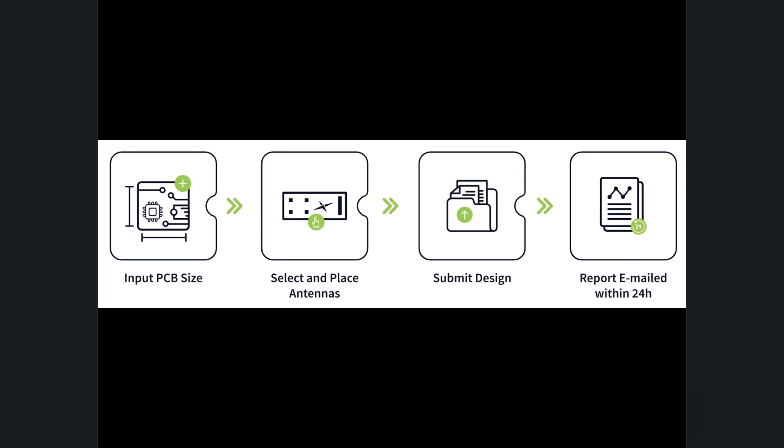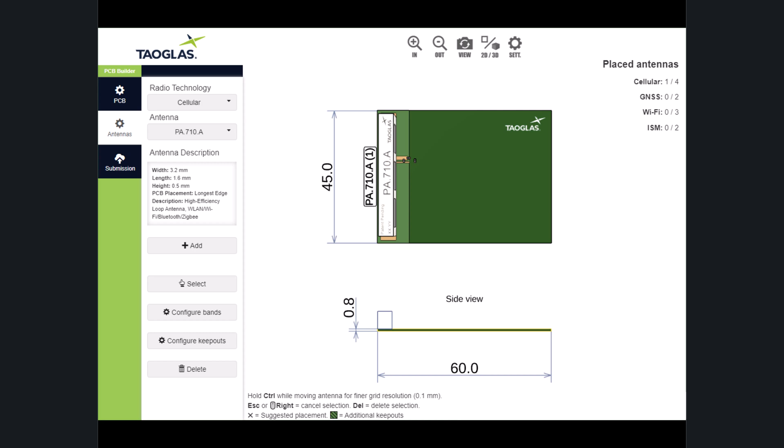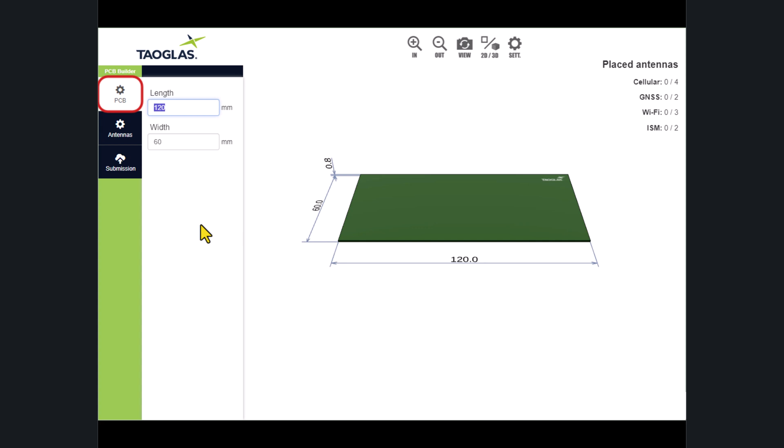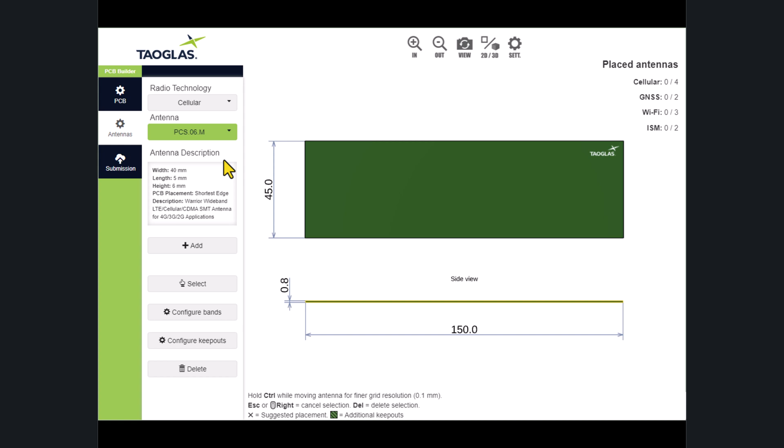To begin the design process for the Antenna Integrator, navigate to the PCB tab and input the desired length and width of your PCB. To place Taoglas antennas onto the PCB, navigate to the Antennas tab and select the radio technology required. Selecting a different radio technology will change the list of available antennas. To view some basic information, such as width, length, and height of the selected antenna, see the Antenna Description field. Once an antenna has been selected, click on Add, select your desired placement location, and click to place.

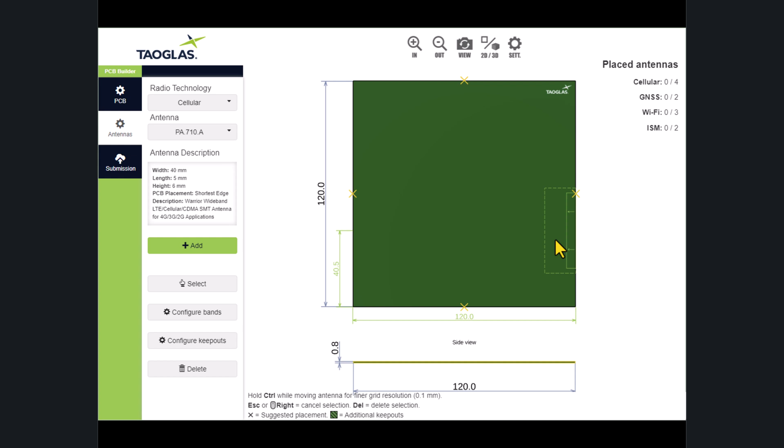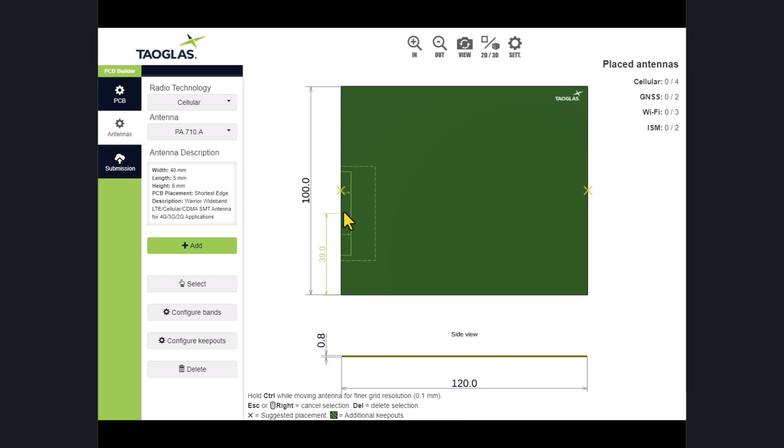Most antennas in the tool are edge mount antennas and can only be placed on the edge of the PCB. Others, such as the GNSS patch antennas, can be placed anywhere on the PCB. Each antenna will have a suggested placement position indicated by a yellow X. Once the antenna footprint has turned green, the antenna has snapped to the suggested placement position. These suggested placement positions are meant to guide users to place antennas in optimal positions for better antenna performance.

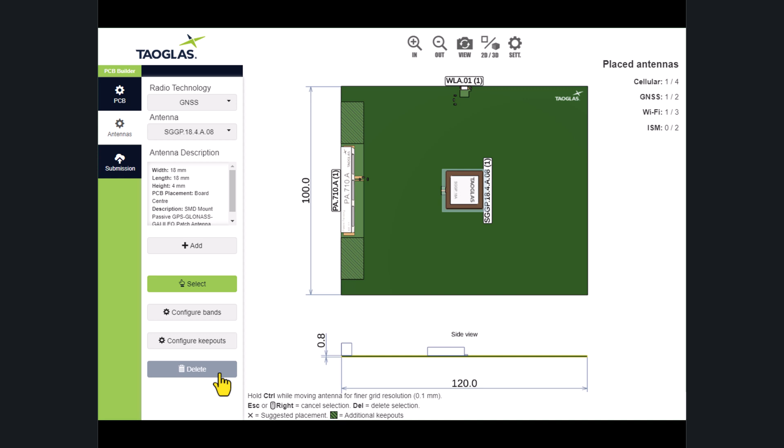To rotate applicable antennas, press R on the keyboard before placing the antenna. To exit Add Antenna mode, right-click or press Escape. To delete an antenna, click the Select button, click on the antenna, and click Delete, or press Delete on the keyboard. Continue adding antennas to the board if required. Note, antennas cannot be placed if they will overlap. This is indicated by the red footprint. Users can place up to a total of 4 cellular antennas, 2 GNSS antennas, 3 Wi-Fi antennas, and 2 ISM antennas.

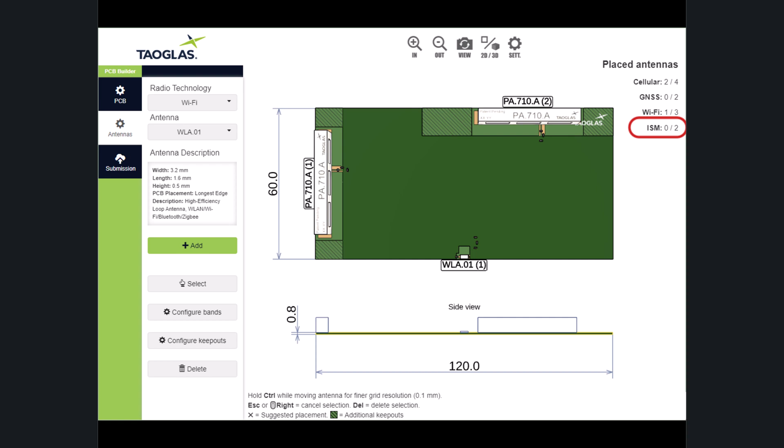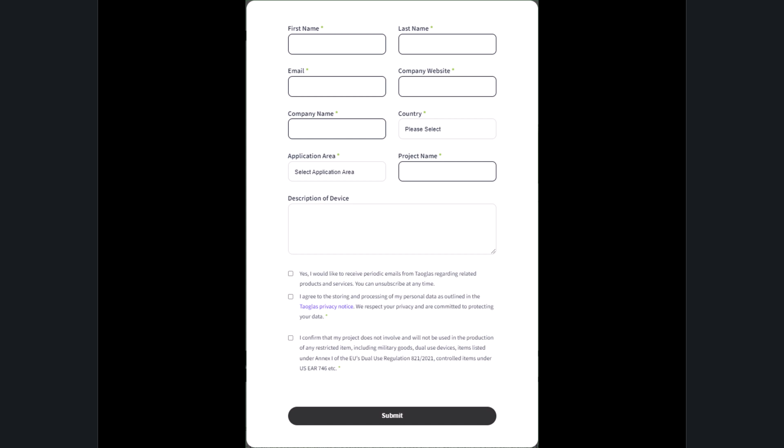Once the PCB design is complete, navigate to the Submission tab and click on Submit Design. Complete the form and click Submit. At this point, users will receive an email confirming that Taoglas has received the submission. Another email will be received when the submission is queued, and a final email will be received including the completed report as an attachment.

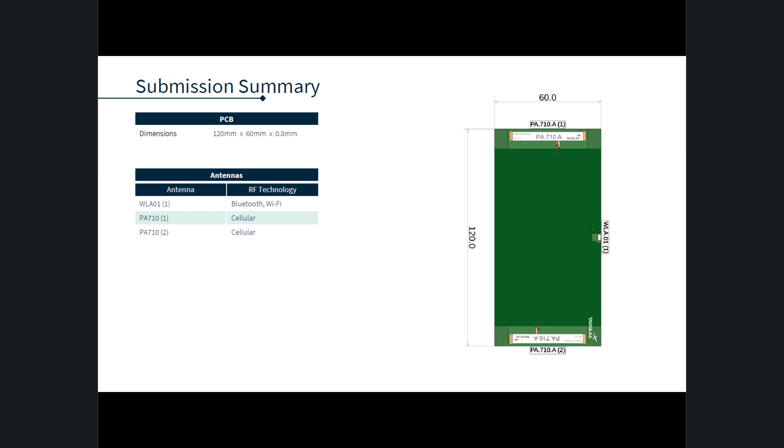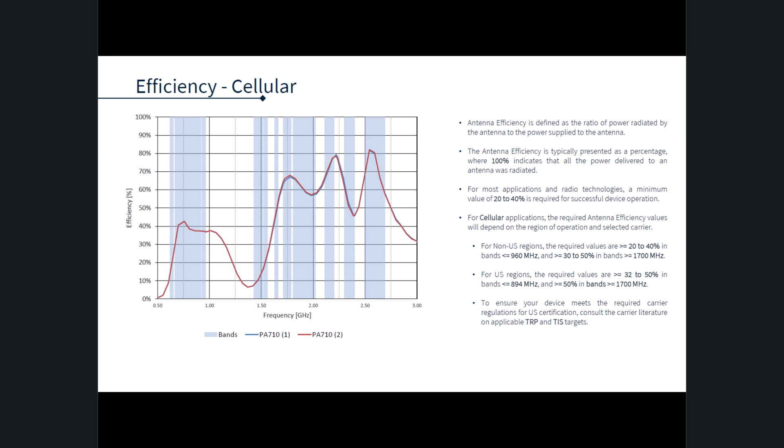The report will include submission details such as PCB size and selected antennas, as well as the antenna performance parameters for each radio technology. These include parameters such as return loss, VSWR, antenna efficiency, average gain, and for multi-antenna boards, isolation. If you would like to get quotes or view full datasheets for the selected antennas, please visit the antenna web pages linked at the start and end of the report. If you have any questions about the report, please get in touch with Taoglas customer service and include the report ID. To provide any feedback, click on the feedback link at the end of the report and submit the form.

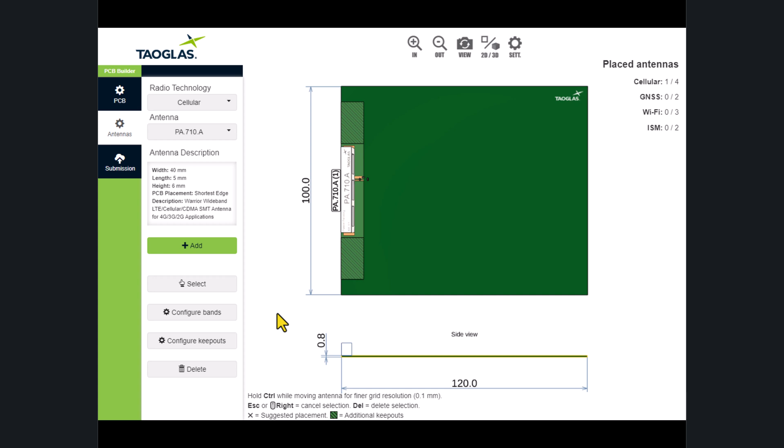The Antenna Integrator also has some optional features to aid in the design. Certain antennas have copper keep-out areas to ensure good antenna performance. The keep-outs are indicated by the striped areas on either side of the antenna. To configure the keep-outs, ensure the antenna is selected and click Configure Keepouts. These keep-outs can be turned on or off, and the keep-out value can be changed.

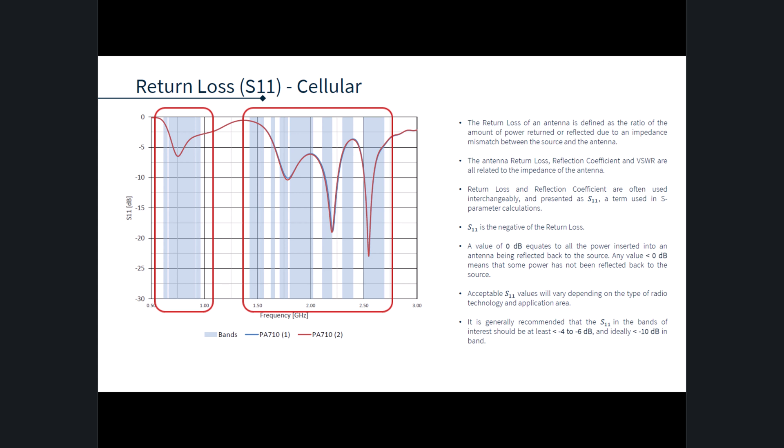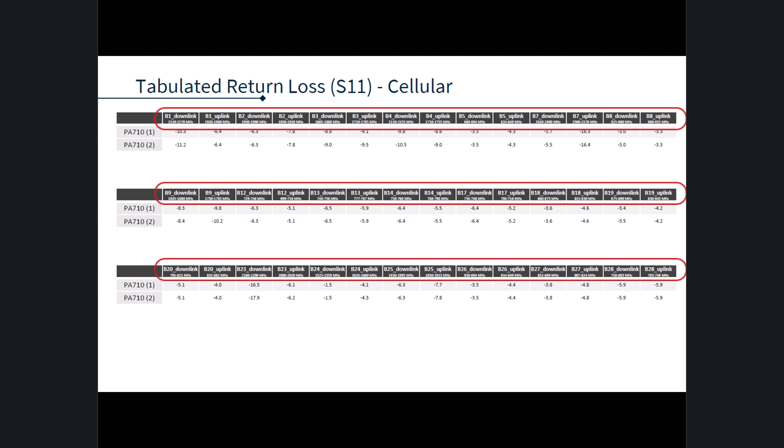Each antenna also has certain frequency bands associated with that antenna. These bands are shown in the report on the charts as well as in the tabulated data. Additional bands can be added for each antenna if required. These additional bands will also be shown in the report. To add more bands, ensure an antenna is selected, click Configure Bands, and follow the on-screen prompts.

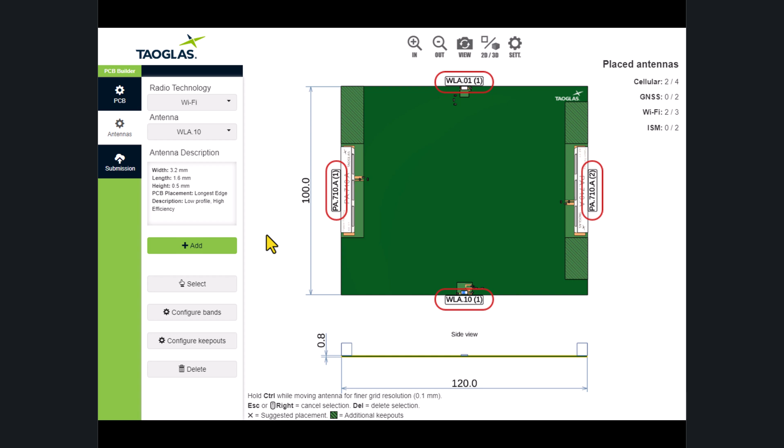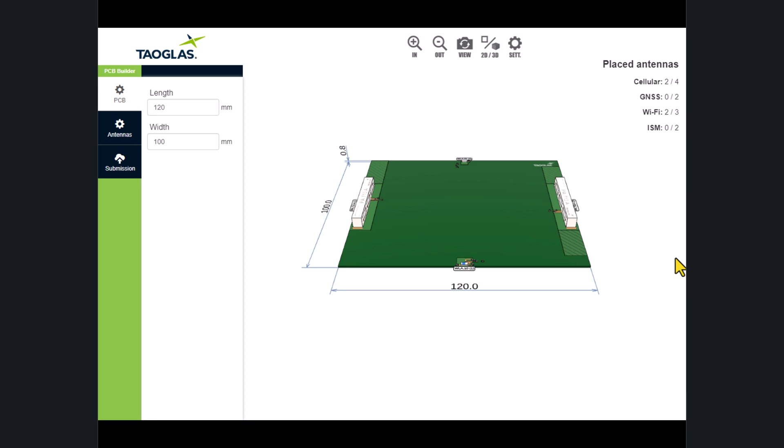Each antenna placed on the PCB will have a label indicating which antenna has been placed. In cases of small or large PCBs, it might be useful to change the label size. This can be done under the Settings option. The default view for the PCB tab is 3D. To rotate the PCB, hold right-click and move the mouse. The default view for the Antennas tab is 2D. To pan the PCB, hold the middle mouse button. At any point, the view can be toggled with the 2D/3D option.

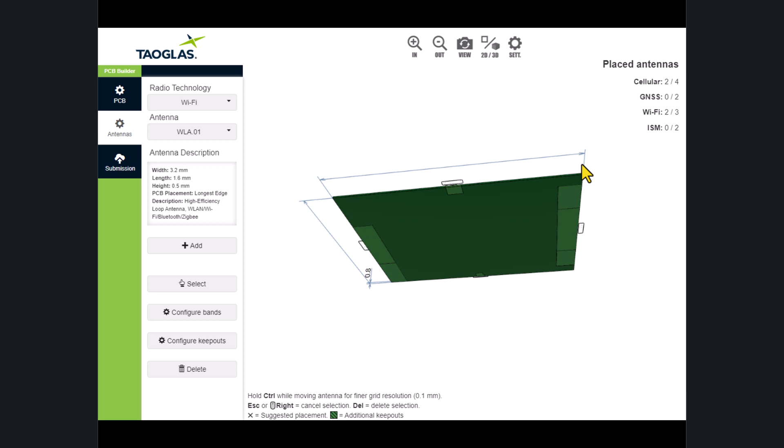This has been the instructional video for the Taoglas Antenna Integrator.